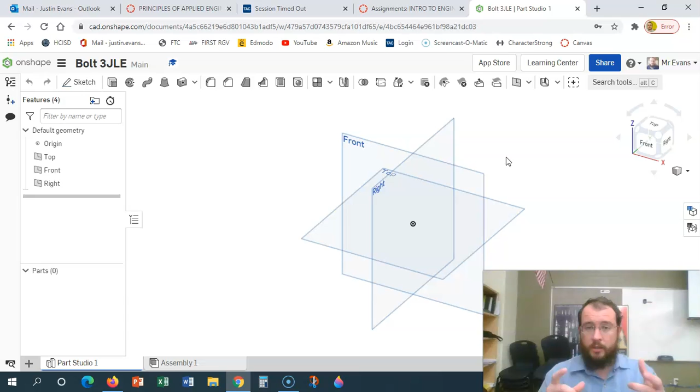So step one, you're going to want to make that hexagon head. We'll create a sketch on the front view, and we need to find the tool that has hexagons in it. Here we go, this looks like it.

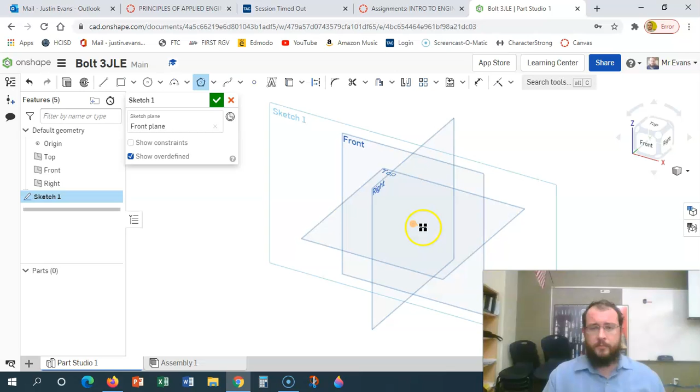We'll go with an inscribed hexagon. I don't know the difference yet, if you're wondering. Let me look at this from my front view here. Now it lets you turn it any direction. I want to keep it as straight as possible.

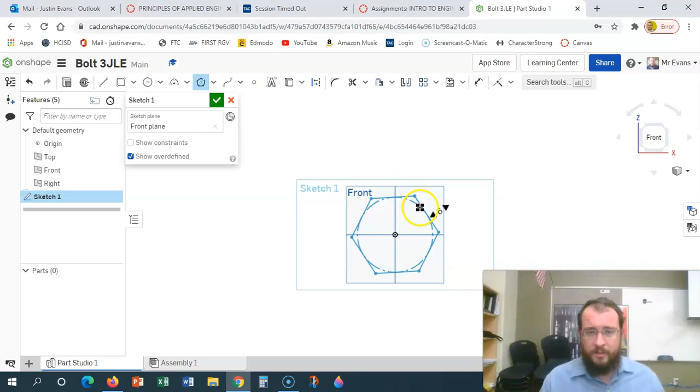And we want that to be 6, obviously. I would suggest the next step is to make sure that these are horizontal. It makes it easier if it's horizontal.

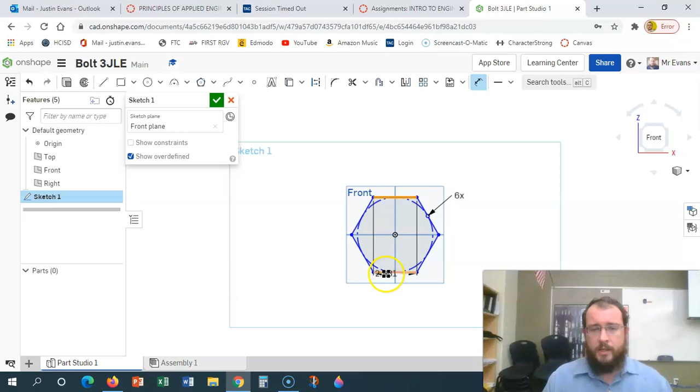Now, the only dimension that you need for your part is the distance from here to here. Whatever that number is, type whatever you get. I'm just going to type in 10, but it's clearly not 10.

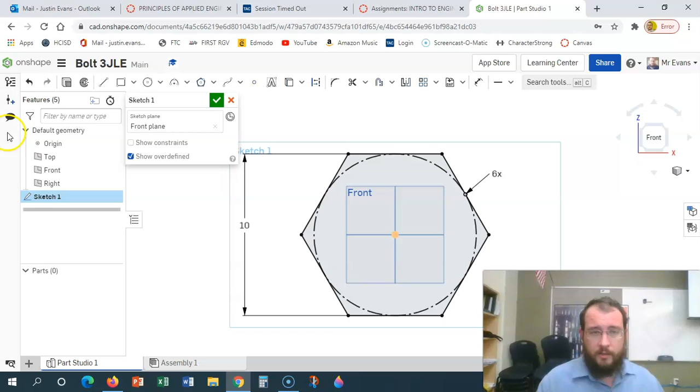Because I'm not going to show you exactly the way to make yours with the numbers that we collected, but rather how to do these things. So we want to extrude that, and let you do that. Good job, that was easy to do.

Now we want to extrude a circle out of the back. Awesome, great, that looks awesome.

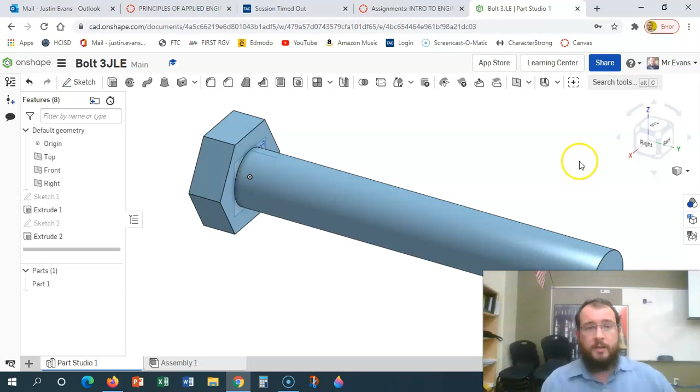Let's keep moving. So the next thing that we're going to want on this is some threads. So you should find that up here. Oh, there it is. So we're going to use the tool helix. Helix is kind of like the DNA strand, a helix, and threads, the little spiral that keeps going up. So you're just going to click on the edge here.

Now, we want to figure out how many revolutions it goes through to get to the end. Remember, we made a thread count. You want to take that thread count and multiply it by the length of the bolt, not the bolt including the head, but the length of the back part. So you have to subtract the head from the screw part. Take that, multiply it by your thread count, and round it to something that makes sense.

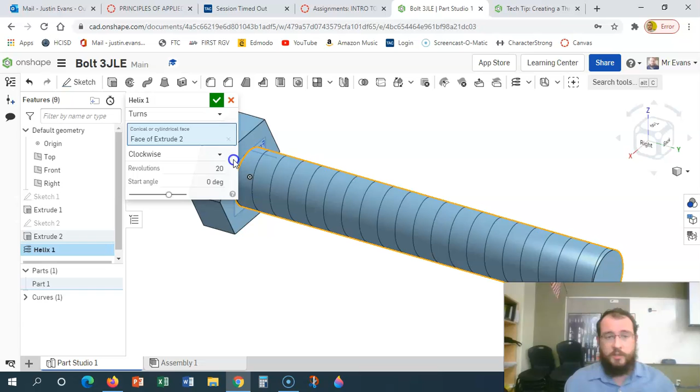I'm just going to put in 20 for now, and we're going to see what it looks like. I haven't really used this before, so we're exploring. I'm just going to put 20. Your number may be closer or further away from that.

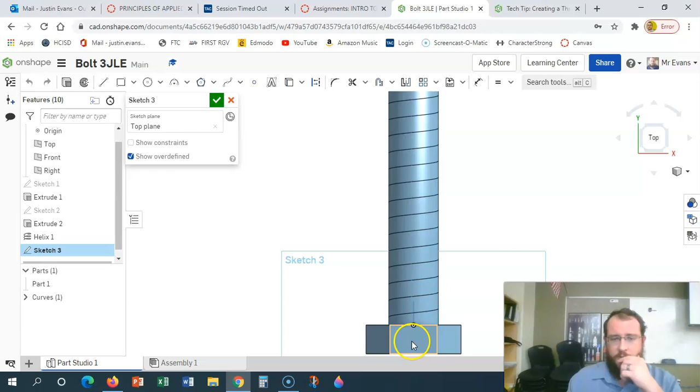The next thing I want to do is, since I put it on the front view, I want to take the top view and put a sketch there. So let me look at the top view. I want to zoom in down here, and I want to try to get an estimated length about there.

I'm just kind of estimating it, so it's not too important where that sits, but I'm going to make a triangle here. And the size is not important just yet. What is important, from what I've understood, is to make it an equilateral triangle.

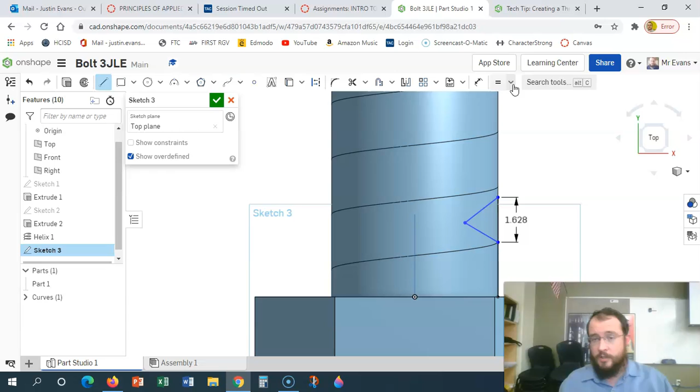So if you come up here, we're looking for the equal button here. Let me click on the equal button, and I want this to be equal to that, and this to be equal to that. And that's what we have.

Let me hit escape, and then I want to change this to, I'm not sure yet, maybe 1.2. No, that seems too small. Maybe 1.5.

See how that looks. And I want that distance out there to try and put it at the first helix, if I can. I don't want the threads to start back here. Usually the bolt has a little bit of

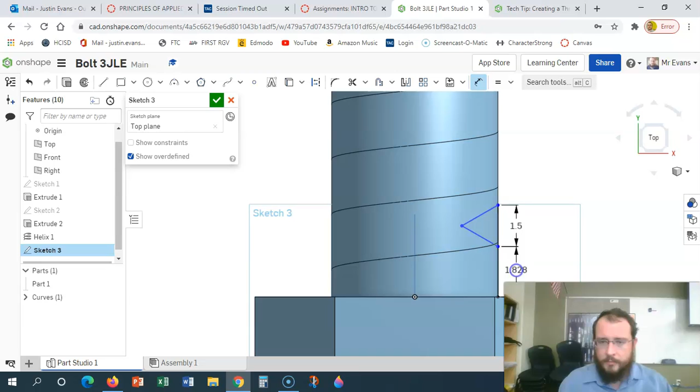length away from the end. So think that was close to 2, right? Again, your numbers are going to be different because I'm making mine a really large bolt compared to yours. Hit the check mark.

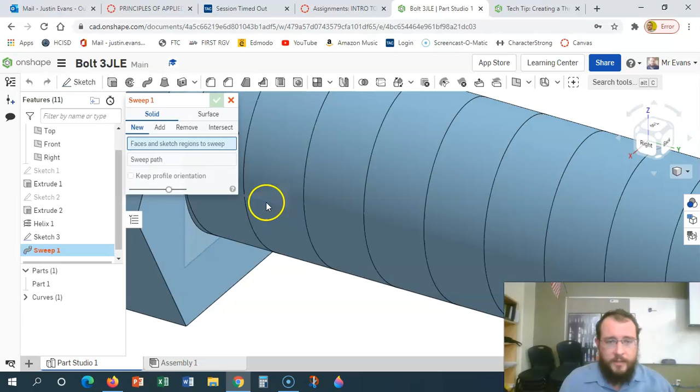Now I'm going to use the sweep tool. And I want to get that face, which is, of course, our triangle. I think it doesn't like that line I put there, so let me delete that line.

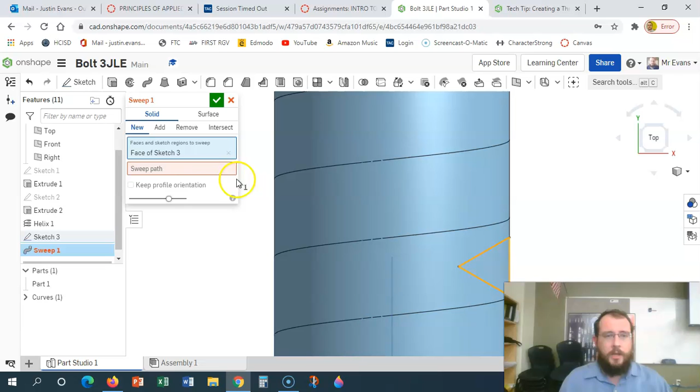I think it's messing with it. See if that fixes our problem. There we go, that might have been the problem. So we wanted that face, and the sweep path is this helix. And we want it to be a remove. And that should be it.

So there's our threads. Now, if we look at it and think, that doesn't look very good, we can go back and change things. Looks like it still went back to there anyways.

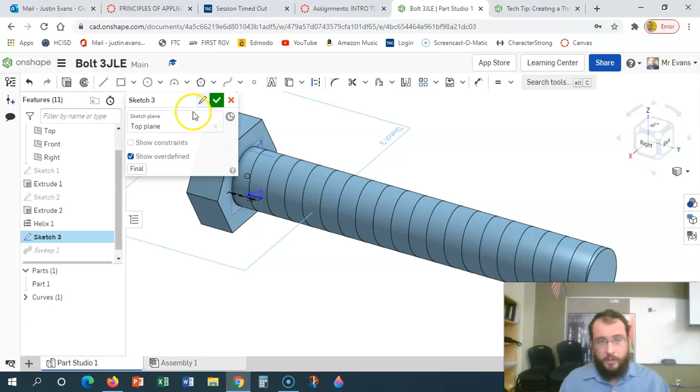So I can go back and change the sketch and maybe dial down that size. Maybe it's too deep. We're exploring, so... I don't think I hit save, did I?

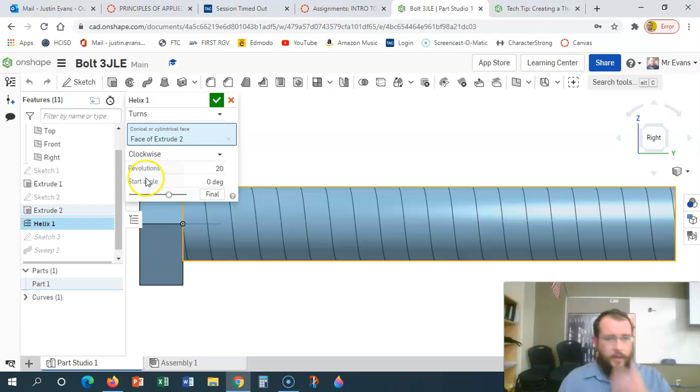We could also work with the number. I think the depth for that looks pretty good. Maybe I was off on my number here, so I was kind of thinking somewhere between 20 and 24. So let me do the higher number, see how that ends up looking. Well, that's interesting that it stopped like that at the end.

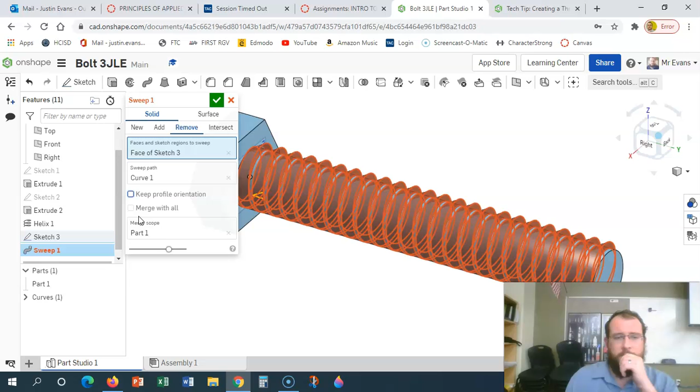I'm not sure if that's what we want. Okay, so we'll leave it like that. I think we've got it. I hope we got it.

Now there's a lot of other things you can add to make this look better, and I'd suggest you play around with the chamfer and round tools. But before you do that, we need to put our 4.8 on the front. So step 1 is to create a sketch and put a little dent in the front.

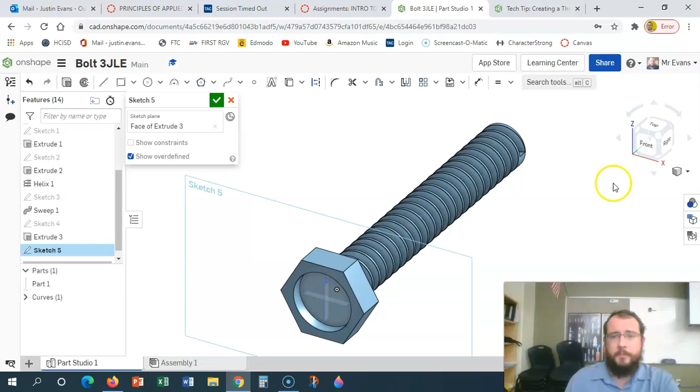Great, good job. We have those dimensions from before, so that's good. Now let's put the 4.8 on there. I'm going to click on that new lower surface, and I'm going to click on this text button here and type 4.8.

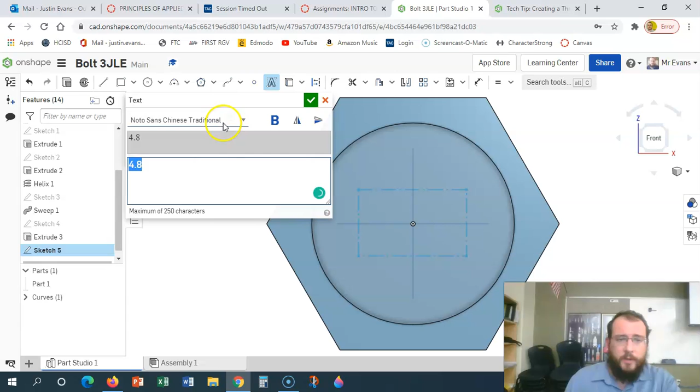Now you should be able to explore different text styles and find which one looks best. You can see it right here. So look at the picture of the bolt and figure out whichever one you want. I think you have to highlight it—if you don't highlight it, well, maybe it still works. Play around with how you think it could look, and then hit the check mark, and it puts it there for you.

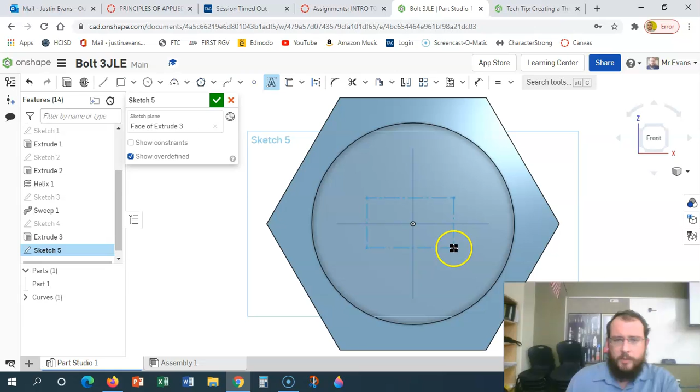You should be able to control the size a little bit. Let me see if I can do that. Oh, maybe it just controls by the size you put from the beginning. So I guess you control the text size from the start. That's interesting. Well, anyways, choose whichever one you think looks best.

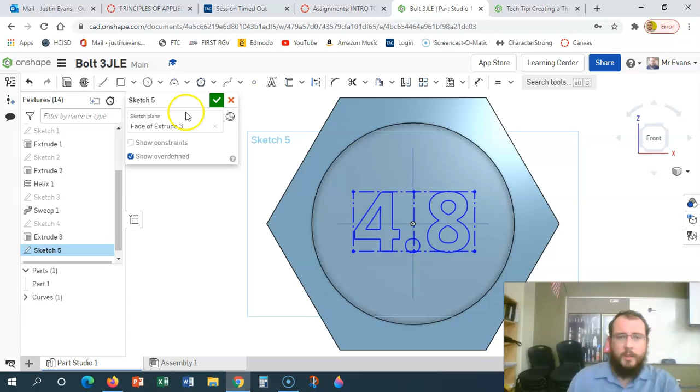Let me not spend too much time on that. You can move it however you want and hit the check mark, and then you can extrude it. There we go. Now you choose how far it should come out. You might want to do what I did there and slightly turn it to take a look that it's not coming out too far.

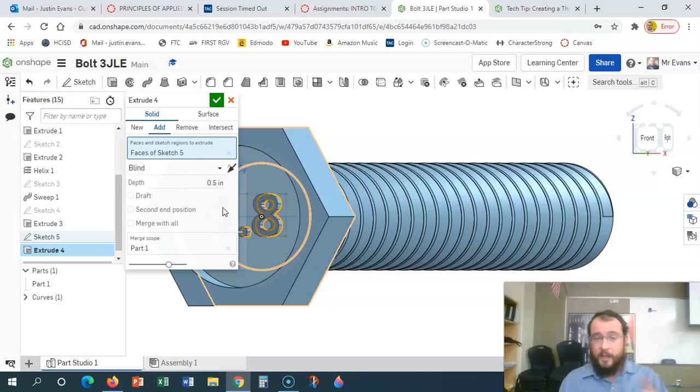Again, remember you're not looking at my numbers, because you have your own numbers. So make an estimation on how it should look, and then come back and use the round tool and the chamfer tool to try to make it look a little more realistic to how a bolt looks.

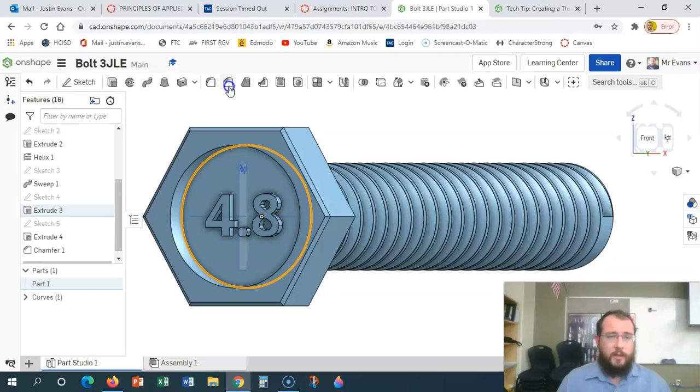Most things don't have flat edges—they're often rounded or chamfered or something like that. So you can play around with these tools here, learn them better, and see what you can figure out. I'm just putting in random things so you can see.

Hopefully we can do a rounded edge here. It might not work for us because of the way the helix works, so we might have to play around with that to get it to work. But we should be able to round that edge. We'll play around with that later if we figure out how to make this helix work better for us. But round off your bolt and use the chamfer to get it looking nice, and you're going to share it with me.

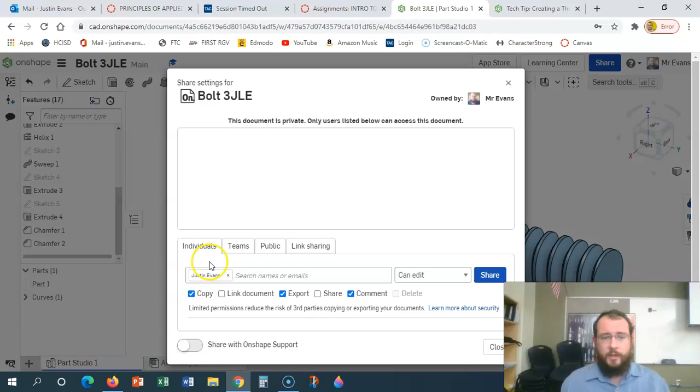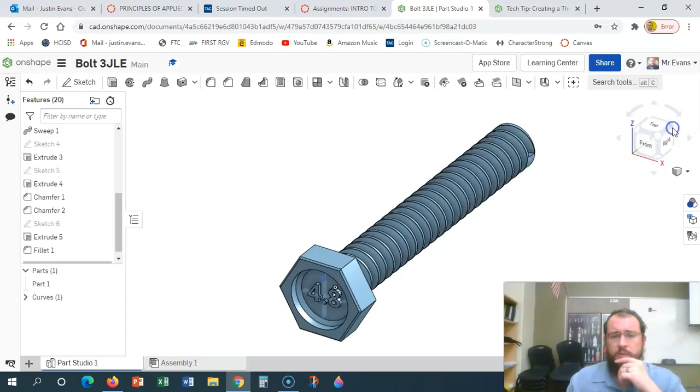All right, so I figured out how to make this look a little better. I came in and added a sketch just a little bit bigger in diameter than what I originally put. I think I originally had a diameter of 6, so then I put 6.1, extruded it out a little bit, and added a fillet. It seems to make it look a little more realistic to the end of a bolt, so that might help make it look better.

The only other way I think it might look better is if we did the threads first, then came in and extruded a little more, and then added the head to it. I suppose you could do the same thing with the cutoff end here.